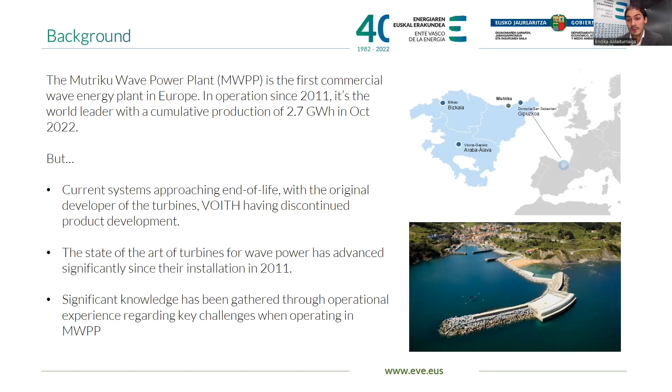So when trying to tackle this reality, this is the thought process we followed. The first question was: are we able to replace the existing solution with already available solutions in the market that we can procure just by regular open procedures? After some screening of the sector, we concluded this wasn't possible, because of the R&D gap necessary — the particular conditions of a standard procurement weren't really applicable to the potential supplier of these solutions.

On the other hand, is the system a solution in which, by means of incremental adaptations — specifically integration or customization — something in that line would be able to deliver that solution? We also thought this wasn't the case; there was still the need for active R&D in this particular area.

But on the other hand, we were thinking yes, we want to substitute the existing ones by best-in-class solutions available in the market right now. But can we really commit to procure what's coming out of an R&D process? We really thought it wasn't wise, because there was an inherent risk of failure in R&D. As with any R&D, success may not always be guaranteed, particularly when starting at pretty low TRL levels.

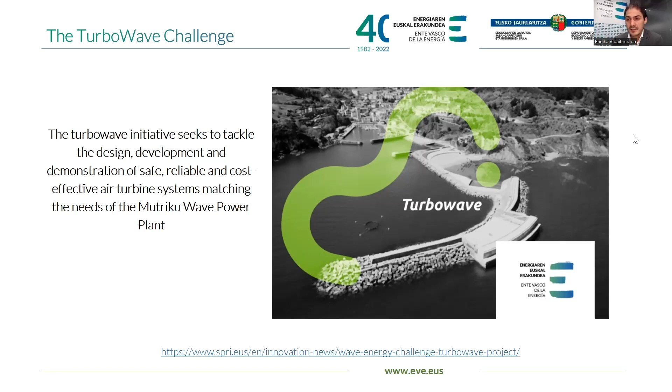And how are we going to actually assess the solutions? In this, we were trying to mirror a bit the IEA-OES framework. It is true that there is no specific adaptation of such framework to components within the wave energy sector or any other, but there were some obvious evaluation areas that could potentially match.

Specifically, if we look at the whole wave energy conversion system, which is the OWC chambers there in Mutriku, we identified that the most relevant here would be the performance - that is, to assess the capacity of the solutions to capture and convert efficiently the wave energy power into electrical power that is grid compliant. The system should be controllable, that is, should be able to operate across the broadest, most probable range of sea states happening there in Mutriku.

The system should be reliable, and for that we are asking for a demonstrator campaign and a real 12-month, full-year wave climate for the developers to demonstrate that those solutions were safe and reliable across all possible wave climate scenarios, and also that they were readily or easily maintainable. At the end of the day, if we set up an expectation that the system should last at least 10 more years after installation, and since we are the owners of the plant responsible for its maintenance and operation, this is something we need to definitely address, as we do have some experience in how that's done there in Mutriku. Finally, as an overarching area, affordability - the cost at which the system is able to deliver grid compliant electricity - this is also very relevant to monitor.

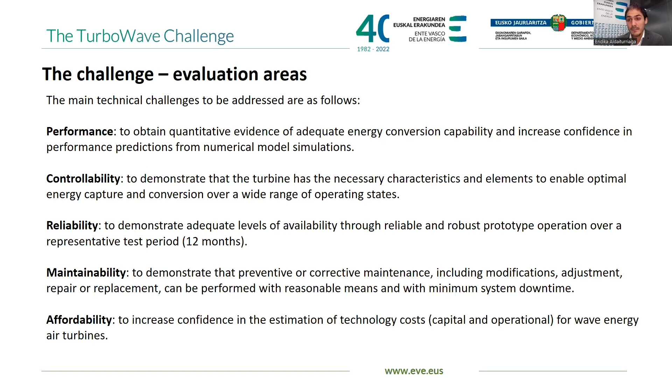From these high-level evaluation areas, we were able to identify some functional requirements. These are relevant. As we were saying earlier, these are set values - it doesn't mean that if you do the math and you're not able to reach 30%, but you're able to reach 29 or 27, that it automatically fails.

These are target values, and the ability of the systems to reach that threshold is something to be demonstrated as part of the execution phase. So yes, we could take them with a pinch of salt, but I think they are achievable, reasonable objectives to set out on the first day. Let's see how this unfolds anyway.

So in what regards performance, we have a target increase for an average annual pneumatic to electric conversion of around 30%, which is where we stand today, to somewhere in the range of 50%. That's what refers to conversion from pneumatic to electric on average.

But as you already know, the power takeoff itself does interact with the primary capture system, and as such we were also aiming for each chamber as a whole to ideally see an increase of the annual electric power delivered to the grid from 20 megawatt hours, which is broadly where we stand today, to 28 megawatt hours per year, by means not only of increased conversion efficiency, but also by increasing availability, primary capture, etc.

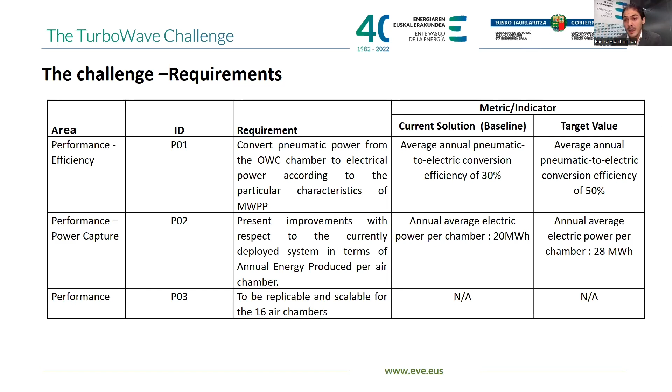And of course the expectation here is that the solution should be replicable at plant level. It's not aimed to have a system that is only operable in whatever turbine. It should be something that ultimately may fulfill that vision we have: complete overriding substitution of the systems for Mutriku in the future.

So in terms of controllability, we were speaking earlier about the range of operational conditions in which the solution should be able to operate. The target here will be to aim for whatever sea state between 0.5 and 4 meters.

If we take a look at the wave climate shared as part of the technical documentation, that will cover, I would say, the most significant part of the occurrence. But again, this is not as simple because period also comes into play, etc. But I think it's a good starting point to not focus on a system which only operates for a small amount of hours in a certain wave climate, but rather is operational in a rather efficient way across as broad a wave climate range as possible.

In terms of controllability too, the system should be able to stop autonomously the operation when those conditions are met, either from the low energetic extreme or in the high energy states. The expectation here is that no manual intervention is needed, and the system is fully aware of what the wave energy influx is, and is able to autonomously operate and decide the best strategies to optimize and behave.

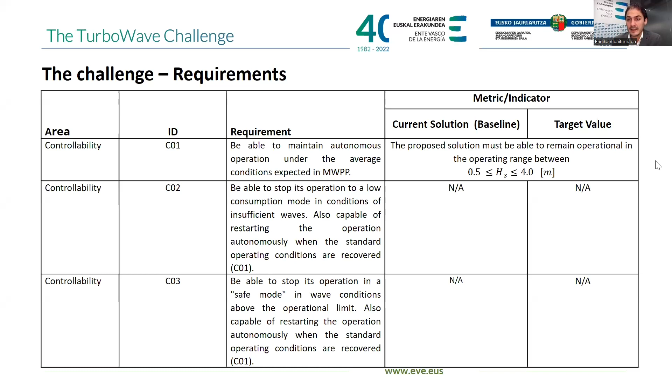Also, during phase 3, the expectation is that key parameter data should be recorded to evidence the outcomes of how promising the solution is. The system proposed should be able to record key data to demonstrate it's able to deliver those performance targets, and it's able to communicate with existing SCADA systems, not only to operate, but also provide performance data or key operational data, while also being easily maintainable and operable, just put it to operation, stop it, whatever, as the current systems do allow.

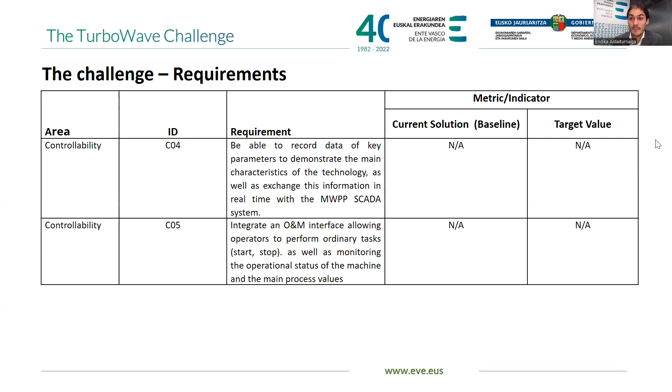In terms of reliability, the expectation here is that the design life for the solutions to be tested in Mutriku is 5 years. This relates to the fact that once we set out on the 2025-2026 calendar, there's always the chance of the worst possible wave climate in 100 years, and everything can go wrong. This is a way of safeguarding to some degree that the prototypes are not too fragile in case conditions are a bit harsher than usual. So this is a requirement for materials and design life that should cover all the subsystems deployed during phase 3.

A specific mention is made of the particularly harsh conditions of the system in the turbine hall, because at least currently the air is exhaled inland through the turbine hall, and as such that's a rather moist and salty environment, quite challenging for power electronics, mechanics, and bearings, and so on. Also regarding reliability, safety is key.

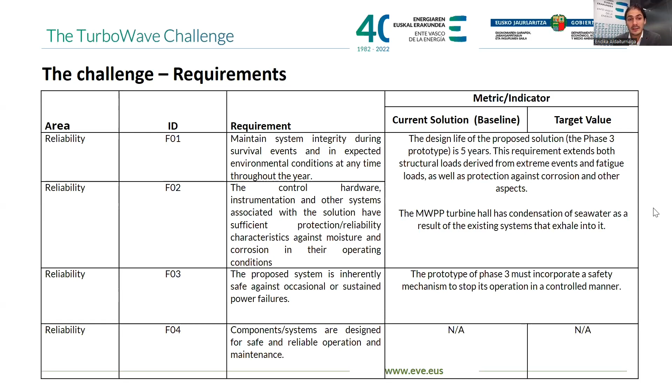We could refer here, for example, to SIL levels or whatever, but this is something to be tackled at the discretion of the bidders. But the expectation is that systems should be inherently safe, that is against power failure, against the most common failure modes.

Should be able to stop safely and ensure integrity of systems as a whole under all scenarios. Then in terms of maintainability, the target we have stated - sorry, there's a mistake in the table - but the target we are setting is that systems should be installed in around 3 hours, which is in line with the current solution. This is again a target value. I'm conscious the solution can be more or less complex, but let's see how this unfolds.

Regarding preventive maintenance yearly, we need to design systems that are maintainable. I'm conscious that sometimes failure rates of prototypes are very difficult to predict - it's something you learn by doing - but we should aim for a solution whose preventive maintenance is at maximum 30 hours per year, so we don't end up with a too complex and failure-prone system that is a headache to maintain in the long run.

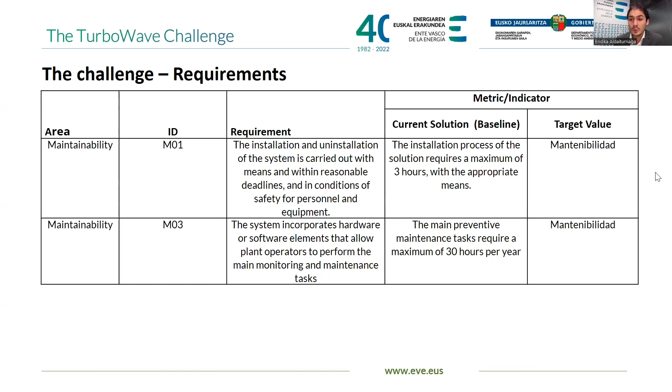Finally, in terms of affordability, this is the overarching evaluation area. We are aiming for a solution that is ideally adaptable - suited for Mutriku, but adaptable through reasonable modifications to other oscillating water column systems, whether on shore like Mutriku, attached to some coastal protection, or even potentially floating. So there should be a solution that has the potential of wider commercialization.

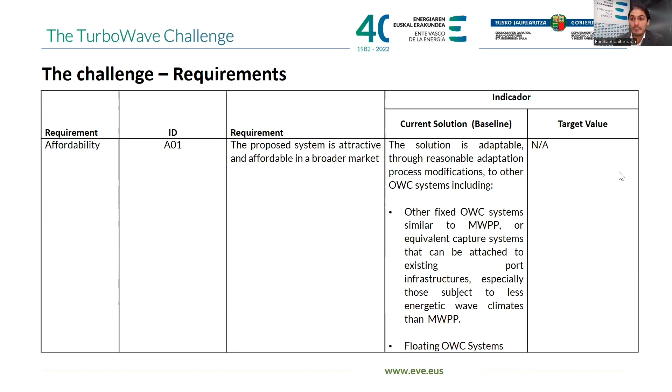That is a key aspect of the PCP. So yes, it needs to be suited for Mutriku, but we should always aim for a broader range of applications. That's the operational context. That's it.

As was pointed out earlier regarding TRLs and PCPs, we thought that for this particular PCP it was a good starting point to ask potential bidders to demonstrate the completion of TRL 2. That's kind of early in the TRL scale - a concept that has been formulated is probably enough to apply for this.

Indeed, it's one of the aims of phase 1 to produce some conceptual designs of how those general concepts will be suited for the application of Mutriku.

Because we're aiming for 12-month fully realistic operation conditions to some degree during phase 3, one could argue that fully realistic conditions are only applicable when we have a sufficiently long testing campaign in which you have experienced very extreme sea states, etc. This is something a bit out of control, but we could easily claim solutions, after completing that testing campaign, should be able to claim TRL 7 at this point.

We're also saying ideally bidders should propose technology qualification plans, and that should guide the engineering activities across all phases. To this degree, it would be good if this development pathway relies upon some recommended practices available in the market for how technology qualification should be accomplished.

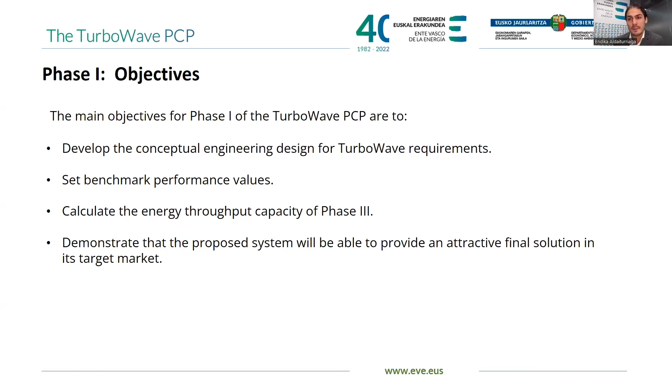The target outcomes here will be to demonstrate that the proposed system is conceptually suitable for deployment in phase 3, and that we should be able to estimate the base performance at the phase 3 test site, which is Mutriku, using robust and recognized numerical modeling at this point, since there's not much physical evidence tentatively in this phase yet.

Provide some clarity on how the proposed concept advances or makes a significant step change with respect to the state of the art of available air turbine technologies, and also conduct a thorough assessment of the key risks associated not only with the technology, but also with its particularization to the phase 3 test site, supported by credible mitigation strategies.

And overall, as I was mentioning earlier, the phase 1 activity should demonstrate that the whole concept proposed is feasible, both from a technical and commercial perspective, and as such is worth advancing to the next phase.

So the mandatory deliverables we have set out for phase 1 are the ones you can see here. It's important to note that these are minimum mandatory deliverables that could be further complemented.

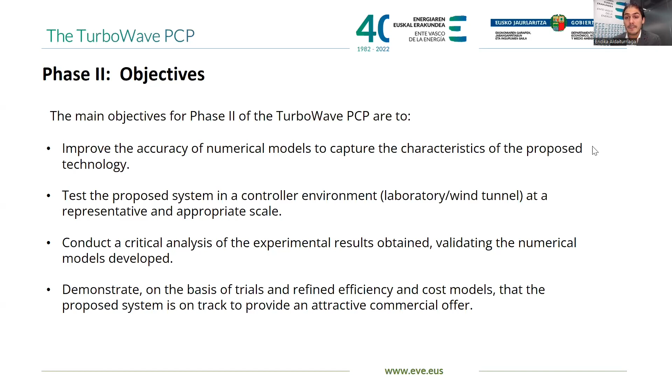In a way that those results should validate the numerical models that were ultimately the tools used to project phase 3 and post phase 3 target figures for the evaluation areas for the performance of the system as a whole, for the value proposition of the system. And then at the end of the day, they're expected to demonstrate, on the basis of the trials and those refined efficiency and cost models, that the system is still attractive and able to deliver the functional requirements that we set up at the beginning of the initiative.

Again, target outcomes for phase 2: at this point we should have some particularization of the solutions for the specifics of Mutriku Wave Power Plant, because the information available on the plant will have an increasing level of detail at this point too.

They should be able to, backed with this dry lab testing, say: look, the system as we plan to build it and test it in Mutriku will be able to deliver this amount of power. This is our expected figures across all the evaluation areas, and also to have worked out some credible estimations of how the technology will perform in terms of affordability, that is potential capex and opex, not so much for the phase 3 prototype, but rather for a future potential commercial solution.

And as part of the ambition for phase 3, they also identify what they plan to do to actually demonstrate that technology's features during phase 3. And overall, that the proposed system has the appropriate level of technical and economical feasibility to continue advancing through the PCP program.

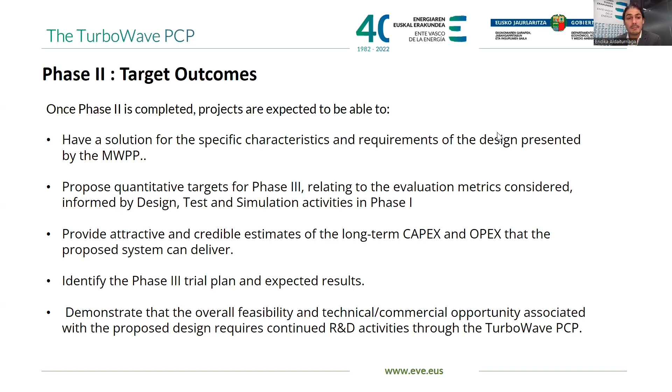I'm not going to enter into the deliverables for phase 2 — those are already set out in the tendering documentation. It's a bit more extensive than the ones for phase 1, but again, probably nothing new there.

For phase 3, the objectives are a bit more complex because we are aiming here for a full year testing campaign. So the objectives will be to validate the proposed approach of how the commercial scale system would look, through manufacturing, commissioning, installation, and testing of the system in Mutriku Wave Power Plant.

While that first unit is being produced, try to identify the main challenges of, for example, manufacturability of the solutions if we move toward larger commercial systems. Also to demonstrate the sustained power production of the systems, through reliable and continuous operation of the phase 3 prototypes over those 12 months.

Demonstrate the survival strategies element, because during those months we will have winter season, and that's going to put some strain on the prototypes, but they're expected to be able to cope with it and prove they are survivable and reliable in that regard.

Also, since that's a full 12-month testing campaign, plant operation and maintenance should happen, and the feasibility of those plans and the suitability of the proposed maintenance plan should be demonstrated practically in those 12 months by the technology developer. Then at the end of the test, the system should be uninstalled in a rather non-complex way, ideally.

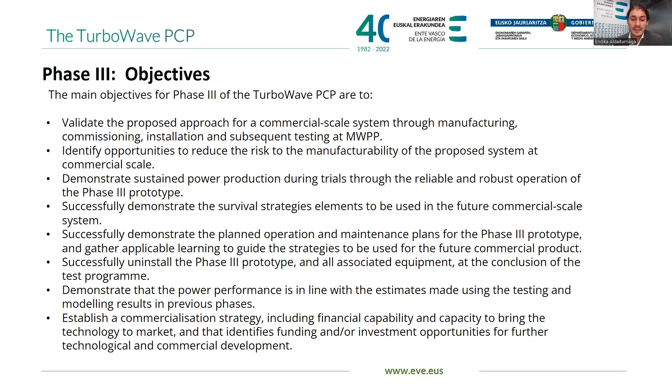Regarding the target outcomes for phase 3, the phase 3 projects are expected to demonstrate compliance with the functional requirements of the Turbowave challenge, demonstrate continuous power conversion, controllability and reliability, and be validated with real testing both in dry lab and in the Mutriku Wave Power Plant, with tested numerical models to predict performance supported by real data, meeting to the degree possible the performance target values set out in the functional requirement sections, and demonstrating the validity and robustness of the proposed strategies for survival, installation, operation and maintenance.

We'll identify lessons learned, and there will be some after that 12-month period. Then there is an end-of-phase-3 risk assessment that needs to take place, to see what gap still needs to be covered before we go for a fully commercial solution, and how we propose to tackle it if the opportunity arises. We'll also identify the main cost elements of that potentially commercial solution, and the sensitivities or uncertainties associated with cost estimations regarding materials, components, etc.

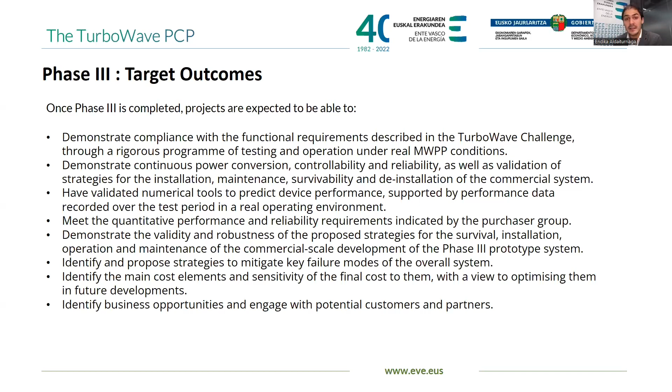In order to have that work done to optimize future developments, and finally to identify business opportunities and engage with potentially future customers and partners to continue the development, and ideally start the commercialization of the proposed solution. So this is the information that was provided along with the call for tender documentation for potential bidders to propose their concept.

Several knowledge-gathering activities have been triggered, starting around 2021 and 2022, running in parallel to the preparation of this PCP. For that, we accomplished a detailed characterization of the wave climate. This was shared as part of the tender documentation, not only the occurrence matrix but also the return period, etc., which should fit, at least at a preliminary level, the proposed concepts and how those will particularize for the Mutriku Wave Power Plant.

Regarding dynamic modeling, there was also effort put in because this is a huge source of uncertainty, as it has been in the past. We made the first steps in characterizing, with increasing level of detail, how one chamber behaves and how chambers interact with others. One question posed was whether this would be made available, and the answer is yes — the expectation is that hydrodynamic coefficients will be shared during phase 1 execution, for developers to incorporate that information into their design and produce their basis of design, etc.

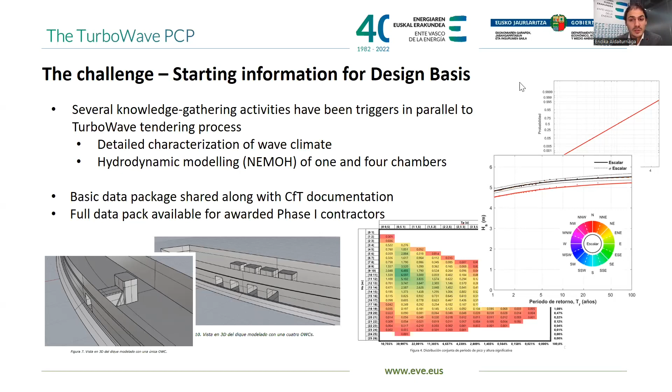Let's move on to the particular aspects of the call for tenders. I see some questions posted there, but as I was saying, I'll try to tackle those later, at the end of the presentation.

So, which is the contracting approach we have followed? For those of you with experience with PCP, this is probably nothing new — this is how the European Commission advises conducting a PCP. That is, there is a framework agreement signed at the beginning of the PCP for those awardees that successfully enter into the program.

We will sign a framework agreement that is not subject to negotiation and will be valid across all the initiatives, and that rules the rights and obligations on both parties in aspects such as IPR management, confidentiality, and lots of things to cover. So particular attention should be made to reading these legally binding documents.

As the execution of PCP advances, successful bidders will be offered call off contracts for a specific scope they are proposing, with specific durations for those phases. So essentially, you will be signing a framework agreement and then a 6-month contract. That would be a very simple document. The templates have been shared as part of the documentation, which ultimately only refer to a proposed scope and an economical offer associated with the bidders.